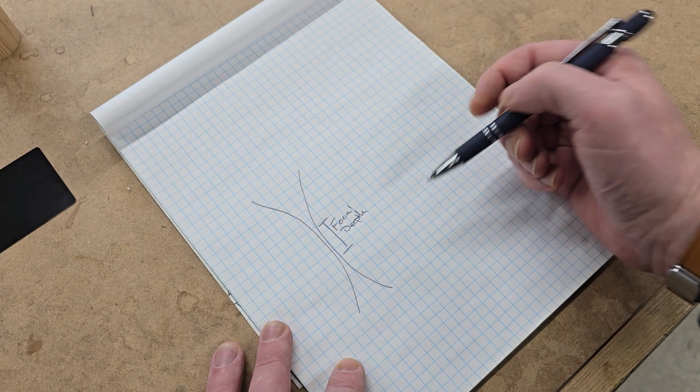On a CO2 or fiber laser, a non-3D laser, depending on your lens, this focal depth can be quite large. One thing to take into account is that with a UV laser, we have a very, very small focal depth. With that small focal depth we get an incredibly great level of detail, but we need to remember it's very easy to get out of focus with a UV laser.

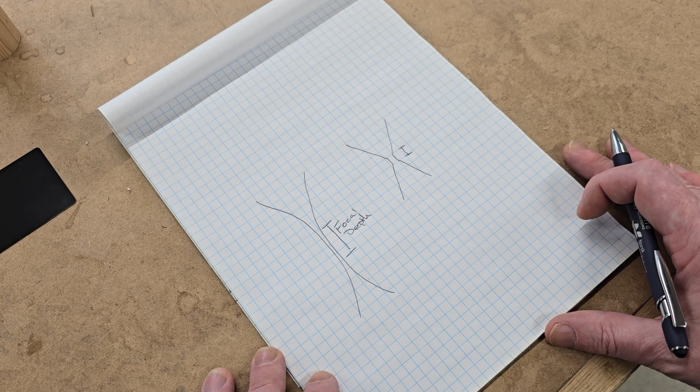On some materials it doesn't make much difference, but on glass this is critical - we have a very small focal depth, and we need to do everything we can to ensure we're marking in the correct location. That's just something I wanted to quickly explain. I think most people understand this, but you never know - some people might be buying a UV as their first laser, so this is important to remember. We'll talk about it more as we get to the laser, but just remember, when I say focal depth, this is the distance we're talking about.

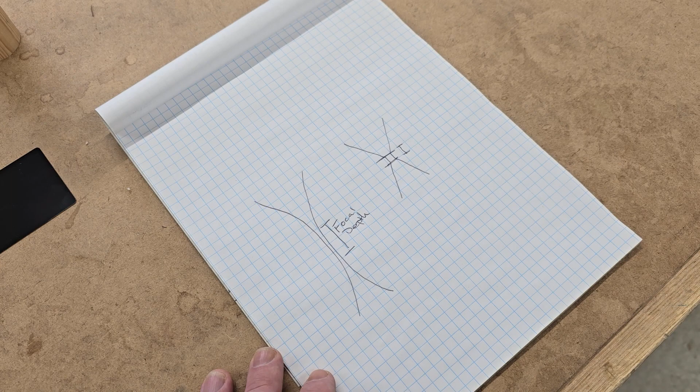Okay guys, welcome back to the video. Let's get started. We're going to start with something very simple - the aluminum painted card that you may have received with your laser. If not, they're all over Amazon and very easy to find. It's a great way to dive in and get your feet wet.

First, you'll notice we're working in our 200 by 200 millimeter workspace. We'll do that for all three of these objects, so this entire video is going to be run on our 200 by 200. That gives us a 120 millimeter working depth, so that's how much Z height we have to work with. We'll be doing everything at 0.

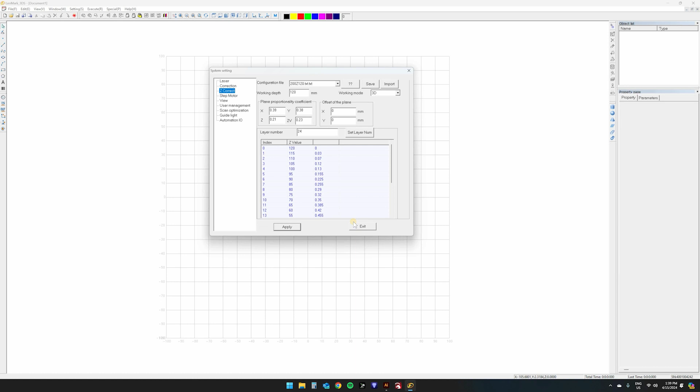We don't really need to worry about working depth at the moment - we'll get into that. So let's get started. First thing we're going to do is import a graphic. We've got a nice Hao Tian logo right here ready to go. We're going to resize it first - let's do 50 millimeters by 57. That ought to work just fine.

Anytime you're working in this software and you see an apply button, always hit that to double check. Next we need to set our hatch parameters. I don't want an outline - I'm going to use the optimized hatch with all the optimization features. I'll leave the angle at 0 and set a distance of 0.01 millimeters, then hit apply.

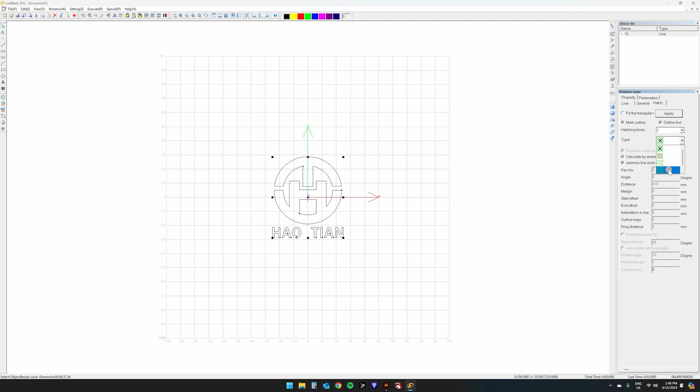Now I'm going to quickly set my parameters here, and then we'll talk a little about how to set it up properly. With this I'm going to do 2000 millimeters per second at a frequency of 60 and a pulse width of 95. I run my laser with an inverted pulse width, so that 100 is full power and 0 is no power. I think a lot of people don't use the inverted, so your numbers will likely be different. I just prefer it this way, it's easier for my smooth brain to figure out.

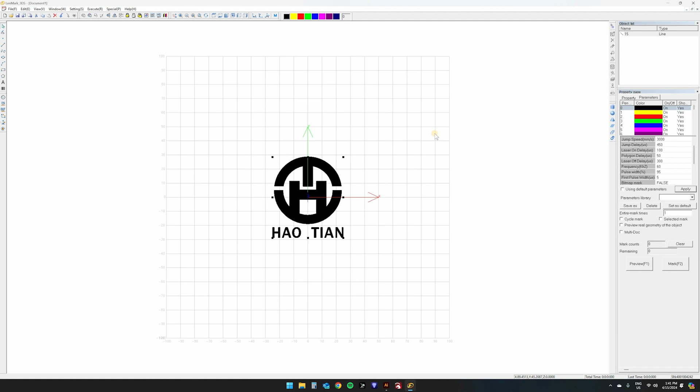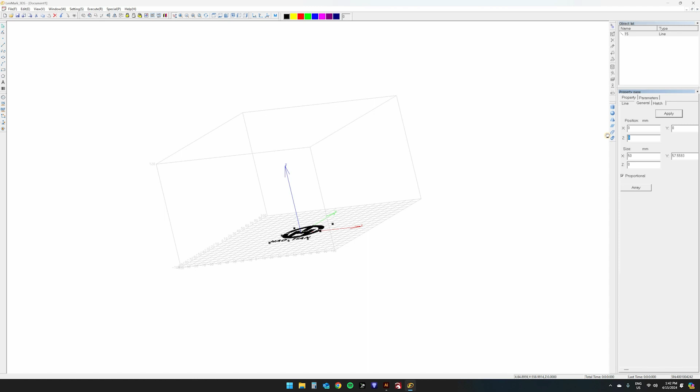Okay, now on almost any other software not using a 3D laser, you'd think you're essentially ready to go. We are not. Because we're using a 3D laser, if we rotate around we can actually see that 120 millimeter working depth I was talking about before. Now, the way these lasers work is we always want to start at the top and work down. Technically you can do it from the bottom up, but I find it can get a little confusing, and focusing, in my opinion, is a lot easier doing it this way. So what we need to do is move our graphic all the way up to the top of our box, which we know is 120 millimeters. So let's go to our properties, into general, and set our Z height at 120 and hit apply.

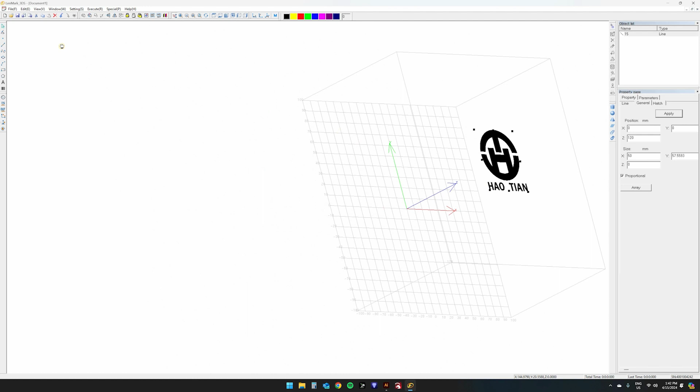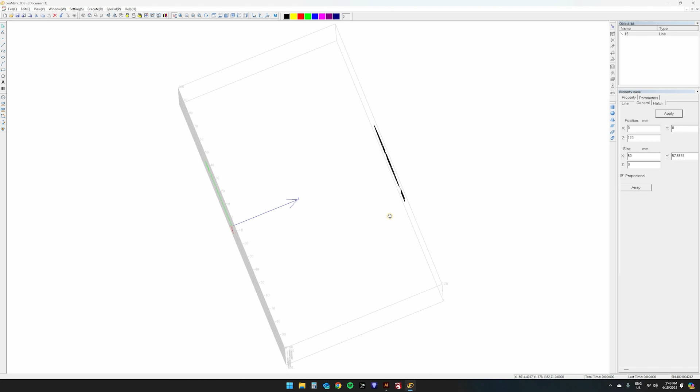And now you can see we are right at the top there. So now when we go to focus, using the focus distance written on the side of the laser head, we can focus directly down to that highest point, which on a card, the highest point and lowest point are the same, but this is something you need to remember when we get into the 3D stuff, which we'll do right after this. So we're good to go. We've got our parameters set, we've got our hatch set, we've moved the graphic in its Z height all the way up to 120 millimeters. So let's head over to the laser, focus it, and run this engraving.

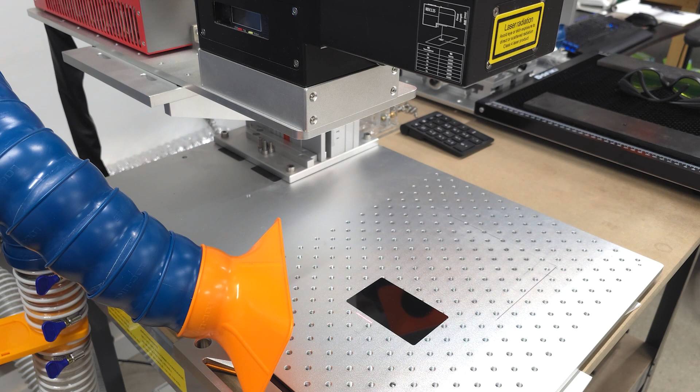Okay, we're at the laser. We have our card ready to go. First thing we need to do is focus our lens to the card. I use these focus sticks that I've made, I've got a few different styles. With this card you can measure. Why don't we show that? You'll want to make yourself some focal sticks, because here we can move the card off to the side and measure up to our mark on the bottom of the head. When you're using a 3D object or glass that's directly under the lens, it gets really difficult to use a measuring stick, so you'll want to make a focal stick for that. We can reference our chart here for measurement height, and our 200 by 200 workspace requires a 234 millimeter distance. I'm just going to move it to the front so I can see it better. 234, there we go.

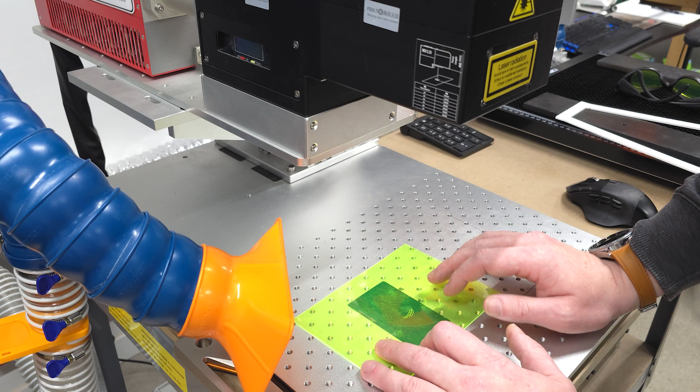Now you can see we have our outline. It's a little difficult to see on this black card. These gels can help quite a bit. I'll have to give Dean a big thank you for sending me this. I believe it's a photography flash gel, but they work great. We're ready to go. I use a wireless mouse here with shortcuts set on these buttons. I believe it's F1 and F2 to preview and fire. So here we go, let's fire it.

Here we go. Pretty simple, not hard to do, like I said. Things do get a little trickier when we start moving into 3D objects, so why don't we do that? Congratulations, you've done your first engraving. Let's move on to the real fun stuff.

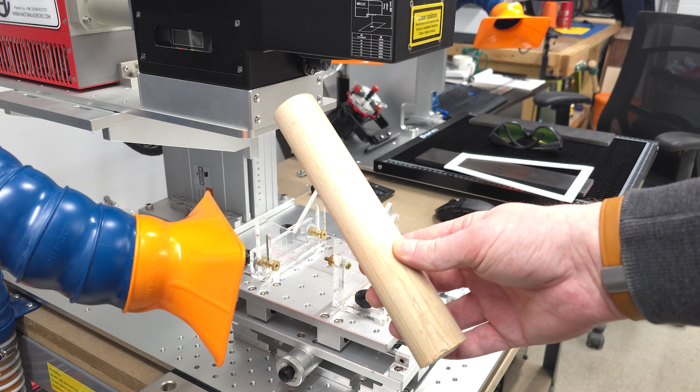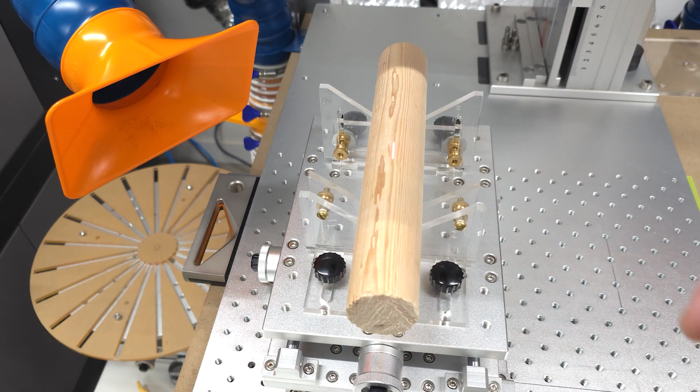Okay, moving on. Next thing we're going to do is a mark on this 1.5 inch diameter piece of hemlock dowel. Again, wood isn't quite as focal dependent as glass, so we've got a little bit of leeway. But what I'd like to show you here is that I'm going to be using this same jig setup for glass. So you'll see that I've got an XY table here, I've run a center line down it as well. You probably can't see them, but I do have center marks on the acrylic line here, and I simply projected a straight line and line mark to line everything up with that.

We'll talk a little bit more about why that is so important with glass. Wood, it's not quite as detrimental, but it's good practice to always make sure everything is as centered as possible when you're working with a 3D laser. And in particular glass, like I said, we talked about that focal depth a little bit earlier.

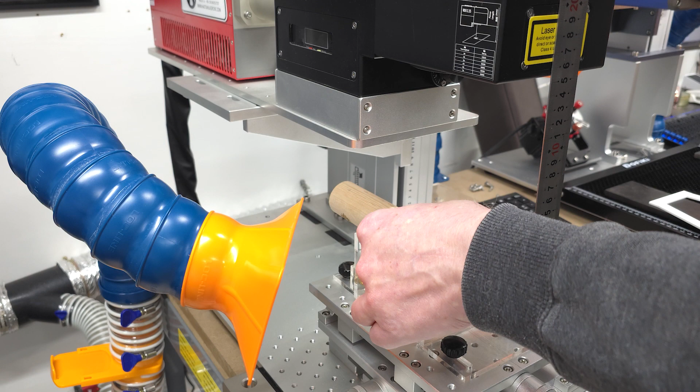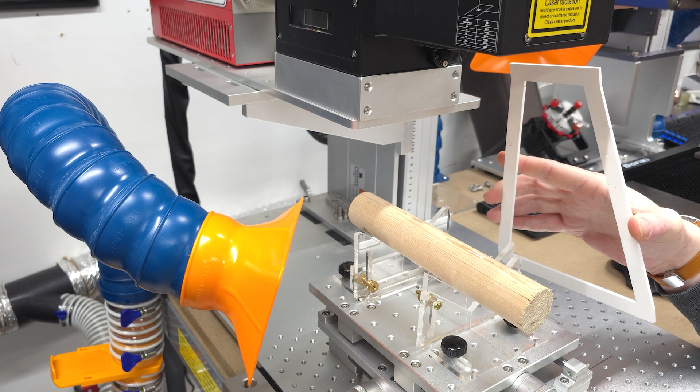And with glass, that focal depth is extremely important. So again, same thing we did before. We're going to focus the very top edge of our object to the lens, and this is where I say to use some kind of a focal stick. With this object, we can really pull it down a little bit and measure from there. Now, if this was not nearly this long and we needed it there, we can't really measure from there. So let's upgrade to our focal stick. Let's use that for the rest of this video. Move the head up and focus to that top edge. There we go.

Now, I typically like to set my object in its place and get it ready to go before I move into the software. And the reason for that is that you get a little bit better of an idea of your framing and everything. You want to make sure everything's in focus. It's very easy to hop over into the software, get everything set, start framing, and then things don't look right. And the reason for that is that you're not focused yet, and sizes will change when they're out of focus. So getting your object down, aligned, and focused first is just a good way to make sure that you don't skip a step later on.

So that's ready to go. Let's move back to the laser. Sorry, back to the computer.

Okay, here we are back in LenMark. I've just started a new document and just imported that same graphic. So let's get started again.

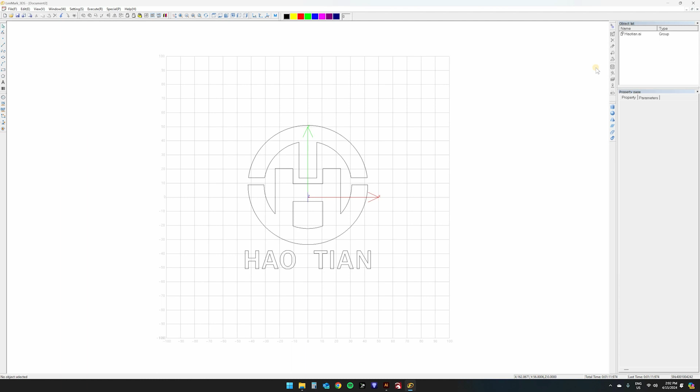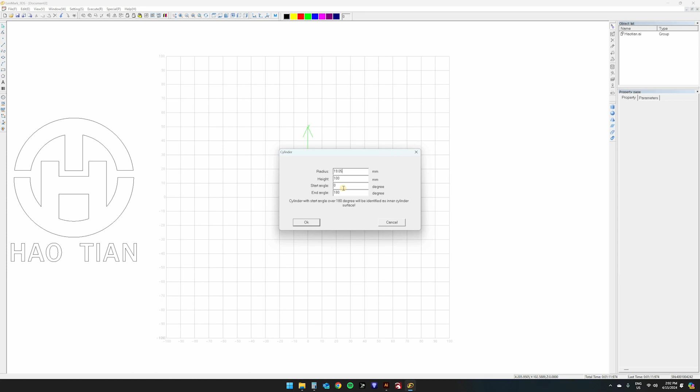First thing we need to do now is create a model to engrave on. We're using a cylinder, so we'll start with that. We're going to need a calculator because we're working in millimeters. So a simple cylinder. Now, I said before that this was 1.5 inches, so let's get that into millimeters. That's 38.1. We'll divide that by 2 to get our radius, 19.05. For this particular object, our height doesn't really matter much. And I'll do a start at 0 and end at 180, so we only have half of a cylinder. There we are. That is our model that we will be projecting this graphic onto.

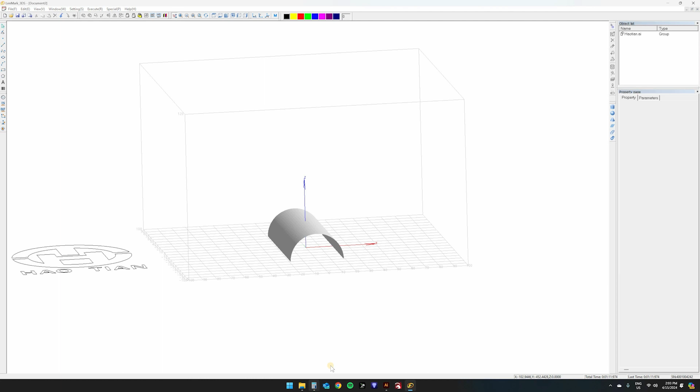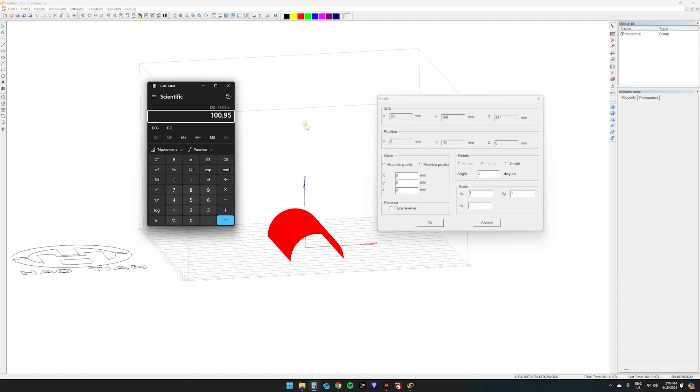Now, same thing, we need to move this up to the top of our working height, and we're going to have to put a little math into this one. Let's select it first. We can bring up our move window. So we know our radius is 19.05. Let's just take 120, subtract 19.05. That gives us 100.95. That is the height we need to move this up to get it to the top. So we'll add that into our Z column. We'll click the relative position and hit OK. Now we can choose a side view just to quickly verify that we did our math correct. The top of our cylinder is at the top of our working field.

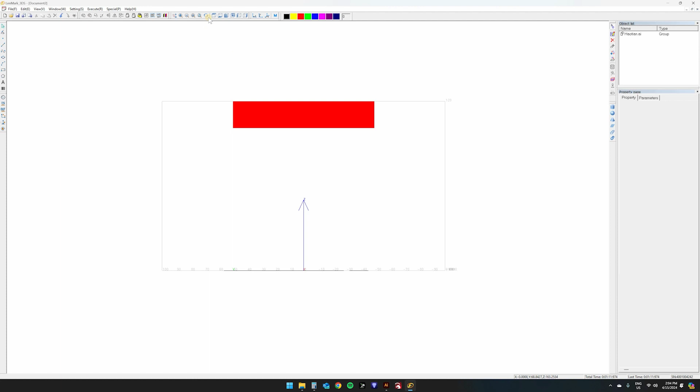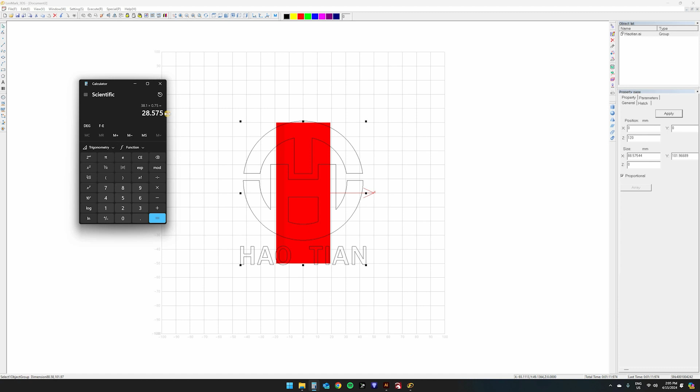So we know that's good. Let's go back to our top view. We're going to select our graphic and bring it back down to the origin, which is 0x, 0y. Now for placement, I usually like to bring it up to 120 so we can see it on top of our object. Obviously this is a little bit big, so why don't we move that down? Let's do, say, 75% of diameter. So we have a 1.5 inch cylinder. We'll turn that into millimeters by multiplying by 25.4, so that gives us 38.1 as a diameter. And let's multiply that by 0.75, so that's 75% of diameter, which is a pretty common target for most cylinder engravings. 28.575. So we'll resize this proportionally by that 28.575 and hit apply. That's looking pretty good.

Next thing we need to do is we need to hatch this. Again, I don't want an outline. I'm going to do a bidirectional hatch on this one. I find it works much better for wood. Again, all of the options selected, but this time we're going to do a 0.07 millimeter line distance.

And there's a few schools of thought on this when doing 3D engraving. Some people like to do a 90-degree hatch, which would be this direction, so that the focusing lens, when you'll essentially be engraving the entire thing left to right, the focus lens doesn't have to do as much work. It only really has to move in, then out, then back in. If you're doing a 0 degree where you're moving, say, from bottom to top, your focusing lens on the head is going to be focusing in, out, in on every single path.

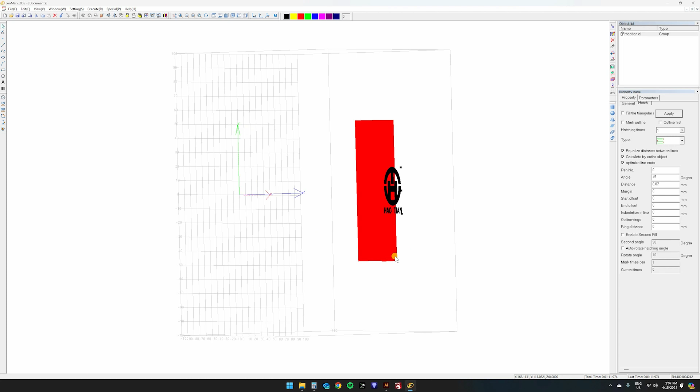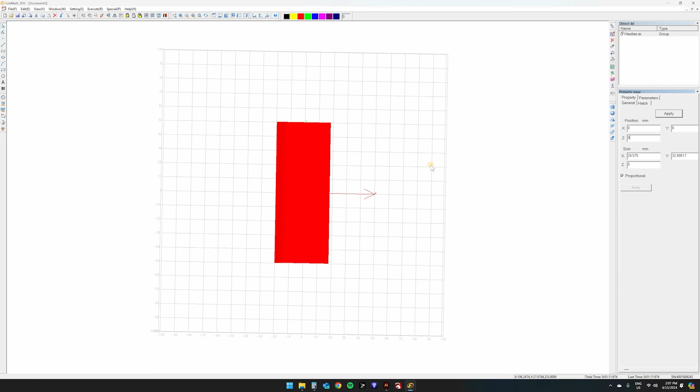Now, this is one of the common problems Mark has been seeing when we're projecting a graphic onto a cylinder. It's a little different when using these tools. You can actually project from that 120 height. When using imported models, you always have to have the graphic down at 0. Honestly, whenever I'm doing a projection onto a 3D object, I always just start at 0 anyway. You can still use the wrap feature, or you can also use the straight projection.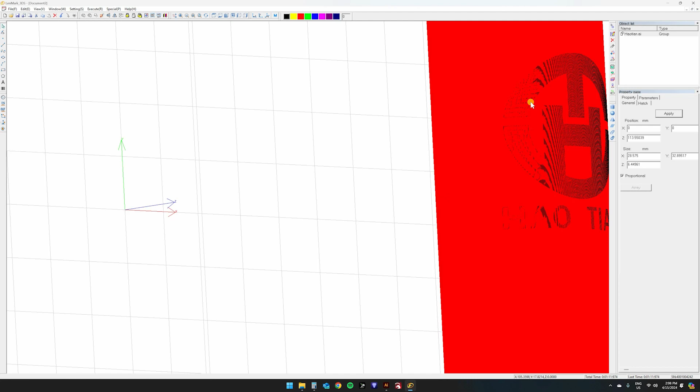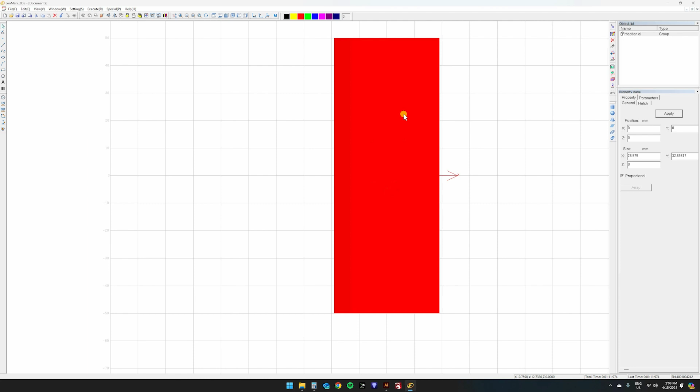Again, it's kind of hard to see. The difference is that this projection mode essentially projects it straight down. You'll see that it's starting to stretch out from our original width up here, whereas if we do the actual wrap, it's the same size. So essentially what it's doing is taking the graphic and shooting it straight down. If you're looking at this object with your eye from this space, you will see that exact shape.

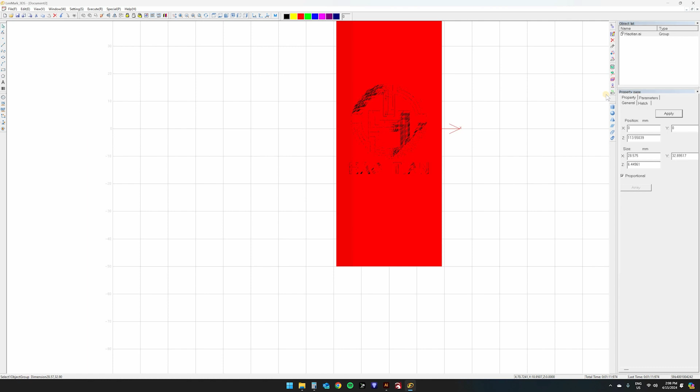I'm sure a lot of you know that when we're doing circular objects on a wrap on a cylinder, we start to get that egg shape. So we correct that by stretching our circle out into an oval, so that when we engrave it, we actually have a circle when you're looking at it. This straight projection mode is essentially just doing that for us, and if you're using an imported model, you'll have to use that mode anyway. So I use it most of the time. Sometimes I don't. It really depends on what I'm doing.

So again, let's take a quick inventory. We've set our burn parameters of the Haotian logo here. We've projected it onto our cylinder. You can see it wrapping around, and we're also at the very top of our 120 mil working depth. So we are ready to go. Let's go back to the laser.

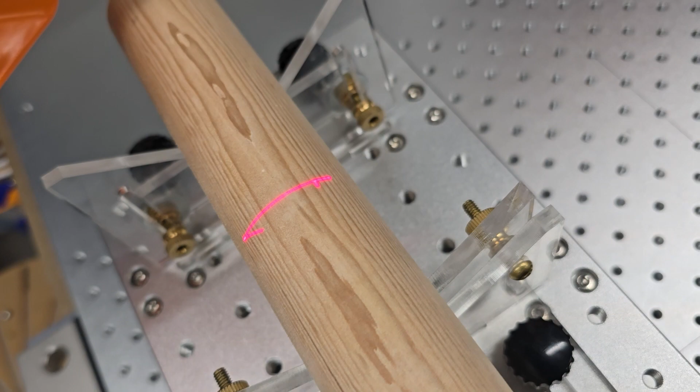Okay, here we are. So again, we've already focused, we've already placed our object, we've got everything on the software set the way we want it. We can do a quick preview. Looks pretty good. Now I'm going to take this off of the tripod so we can get a better look at the actual engraving. There we go. Let's fire away.

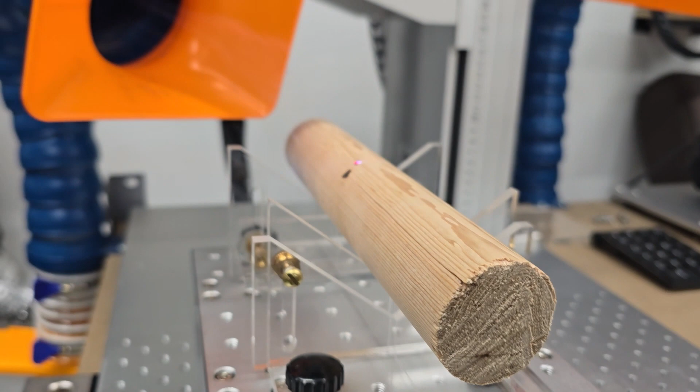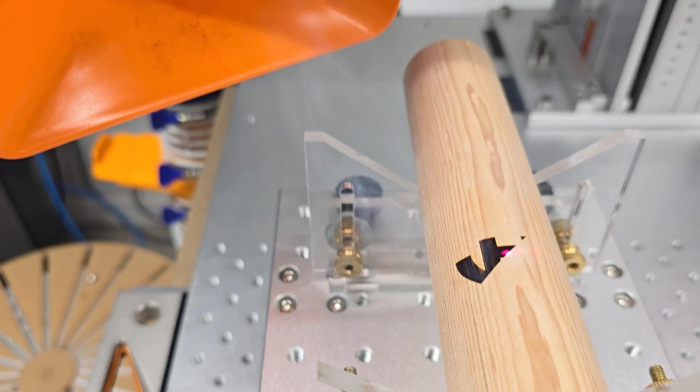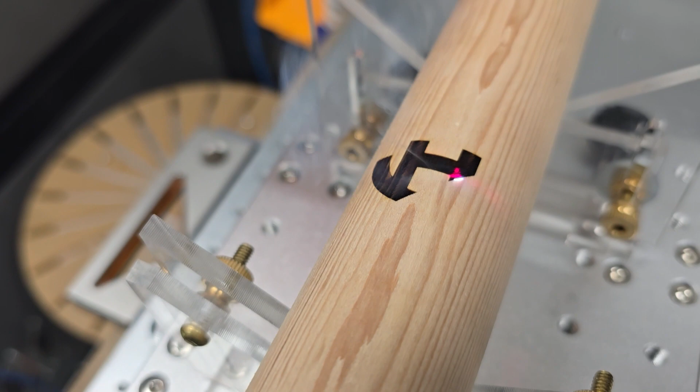Now again, I told you I like to go pretty slow with wood, but that beautiful black engraving is exactly why - that could be tough to get with the CO2. I'm just starting to wrap around the other side now. Get a proper focus. With wood, you really can go a lot further on the diameter, which is very easy to engrave with the UV laser.

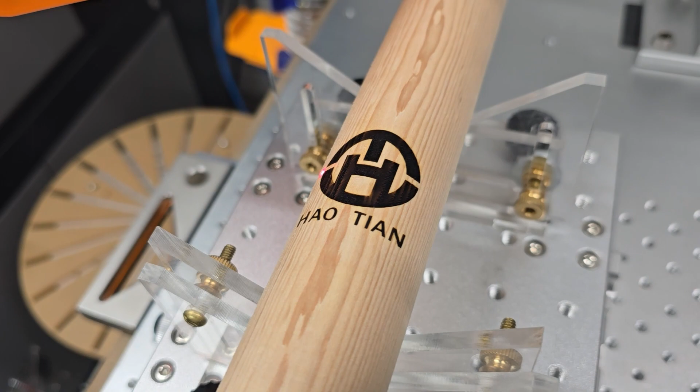Just a little bit of text left, and we're done. There we go, that's it. You can see we got that wrapped down. A little tough to focus, which is going to be a lot more fun to deal with when we do glass. You'll find out glass can be really tricky to try and video and engrave at the same time.

Now here's what I'm talking about with those projection modes. You can see that the circle is actually quite a bit distorted when you're looking at it from the side, but if we look at it directly straight on, we have a perfect circle. So that's really just what that projection mode is doing. Again, play around with it.

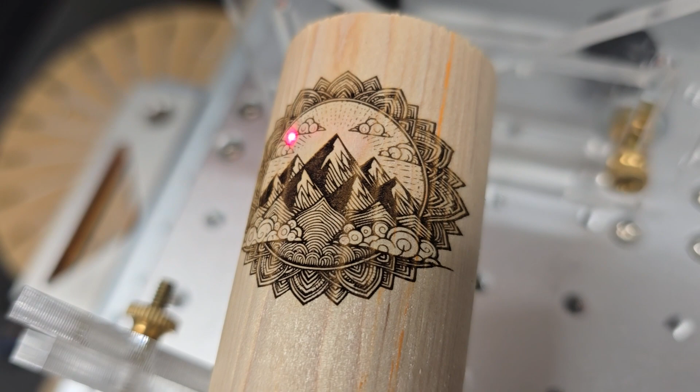So there we go. This dowel I just bought from Home Depot - actually, it was in the trim section, so I was able to just cut off a couple of feet. It only cost me a couple of bucks. And I'm not going to lie, engraving these dowels is a whole lot of fun. Here's another engraving that I've done on it, and you can really show off the detail that UV laser can get. It's the exact same process, same settings, same everything, just a different graphic.

So there we are, congratulations. That may or may not be your first 3D engraving. If it is, good job, you're probably having a ton of fun right now. So let's move on to the real challenge. Glass can be tricky, it can be very tricky, and all of the things we've learned so far, we really need to take into account. Now, like I said, I'm going to be using this exact same jig for this glass.

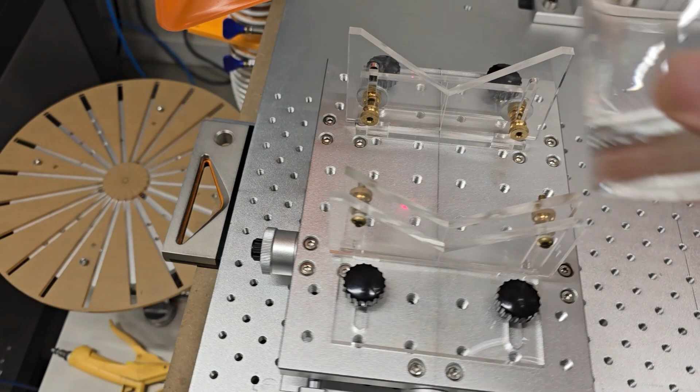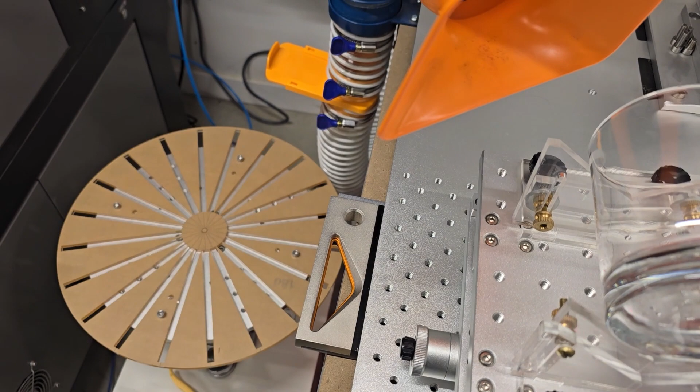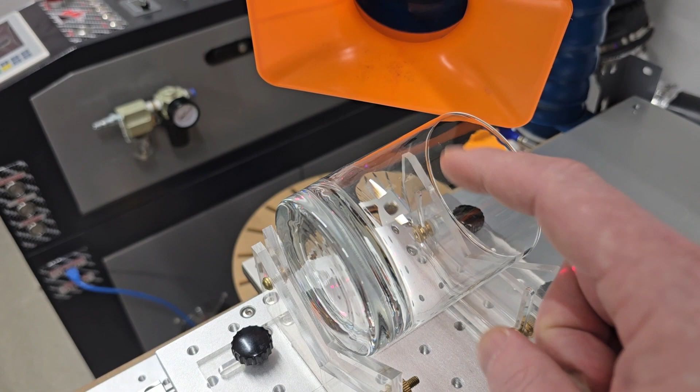We're going to be doing a little bit different setup in the software, just a few extra steps, but we're still going to use cylinder. Again, having your jig centered is critical. If you're using a proper cylinder, ensuring that this top is level is also critical. Now, I know that this is a cylindrical cup, and I know the height of these two standoffs are equal, so I know that this is level.

Now, being level is only pertinent if this is a cylinder. If you have a tapered cup that has a smaller diameter at the bottom, we don't want that top level. We want to make sure the cup is straight. And there are many different ways to do that. You're going to have to find your own way. I find using my grip rotary is a great way to keep things straight for tapered cups when doing glass. I don't actually use the rotary, I just use it to hold the glass. But for cylinders, this works great.

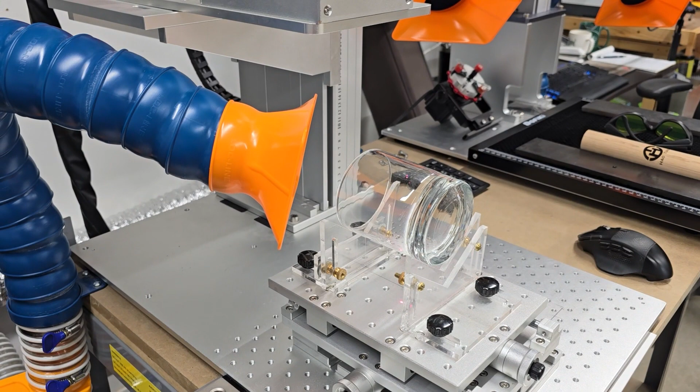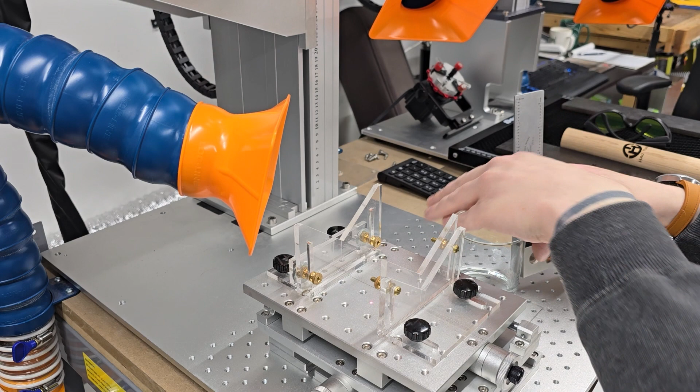Now I'll quickly pop this back into the tripod here. Sorry for my fat fingers. We're going to do the exact same thing. We're going to set our focus height, again with our focal stick. Now, actually, I'm going to double check this because this is not looking like a true cylinder. It is not. There is quite a taper to that. So I'm going to reset. I'm going to set up with the grip rotary there. And we'll come right back.

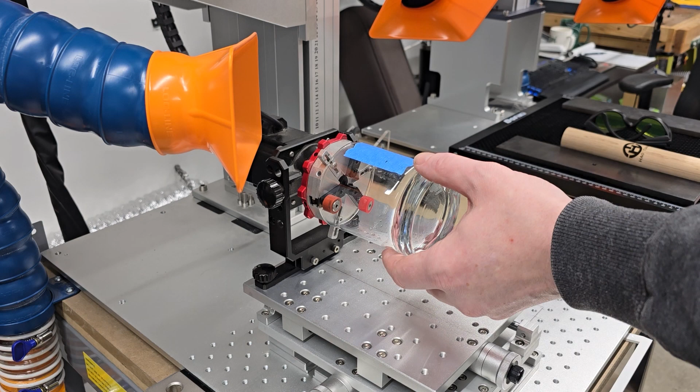Okay, we're back. So we've reset using our grip rotary. One thing I'd like to mention is that I have the head of my laser squared to this table. So what that means is that I can use my engineer square to ensure that the XY table is square to the table itself. And then I can also make sure that the rotary is square to the XY table. That's going to keep everything straight in both our X and Y directions.

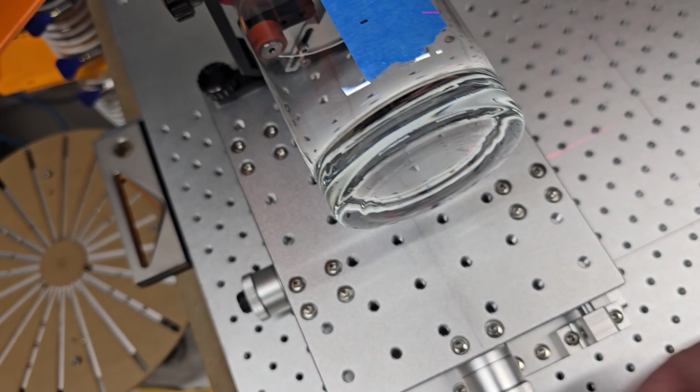Now, I know that this rotary is already centered in our X axis, but we do need to center the glass in our Y axis yet. So I just put a quick piece of tape onto the cup and mark its center line, and we're just going to move the XY table until our alignment cross lines up with that mark. So there we go. Our glass is centered in our X direction, it's centered in the Y direction, and let's remove this from the tripod again.

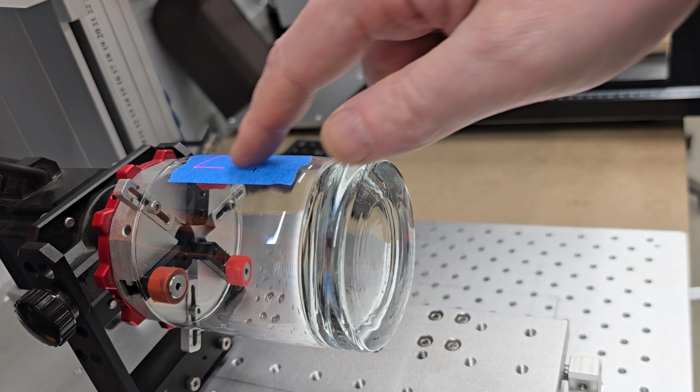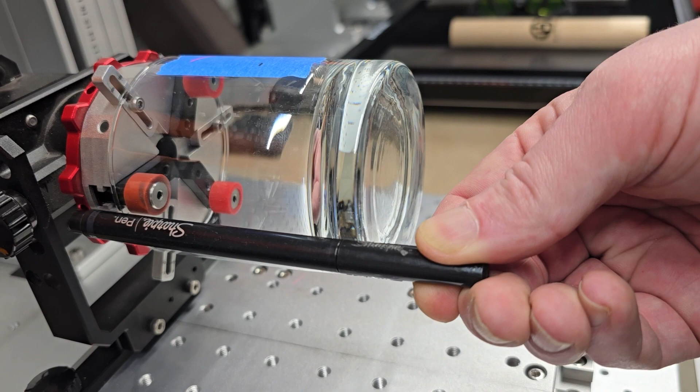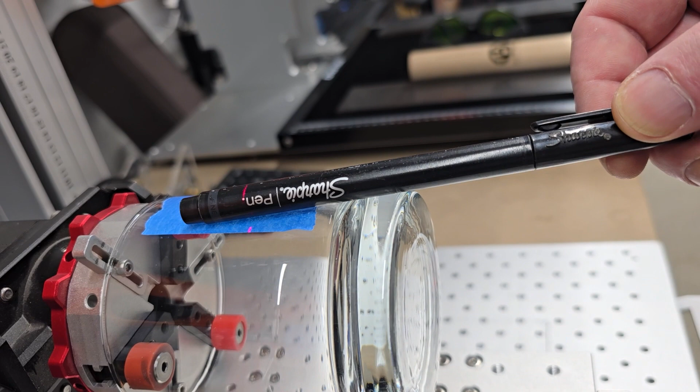This top edge surface is not level. The central axis of this glass, you can imagine going through the very bottom all the way through. This central axis is parallel to the table. That is the important thing with the UV laser. That's how our model is going to be set up. If this top surface was level, we also have to figure out how to rotate the model in our software to reflect that. That's a tricky process.

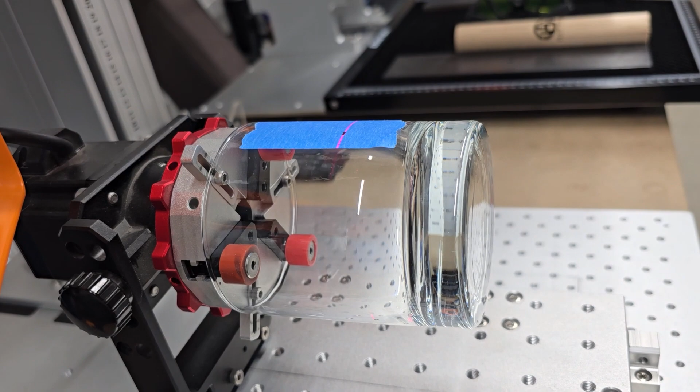I know this rotary is set up with a face square, which means that I know this central axis is also parallel to the table and will match our model in the software. And again, we'll double check our focus to the highest edge, which will be at the top. There we go. Remove this piece of tape. All right, let's head back to the software and get this set up.

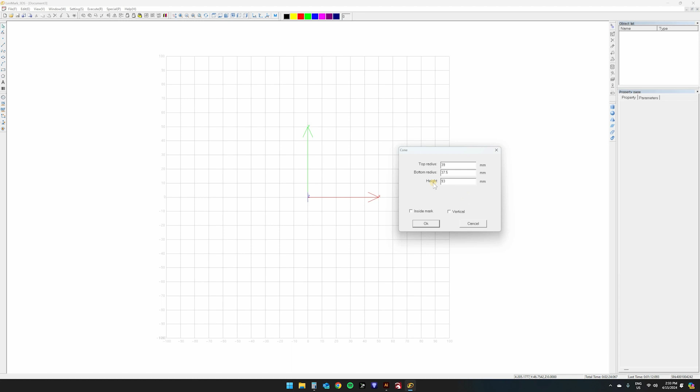Like I said, we're starting a cone here. Now I have my diameters, but we need radiuses, and as you know, your radius is half of your diameter. So we have a top diameter of 78. Divided by 2 is a 39 millimeter radius for the top. The bottom we have a 75 millimeter diameter. Divided by 2 is 37.5. And we have a height of 93. We'll hit OK. There we go. We have our cone.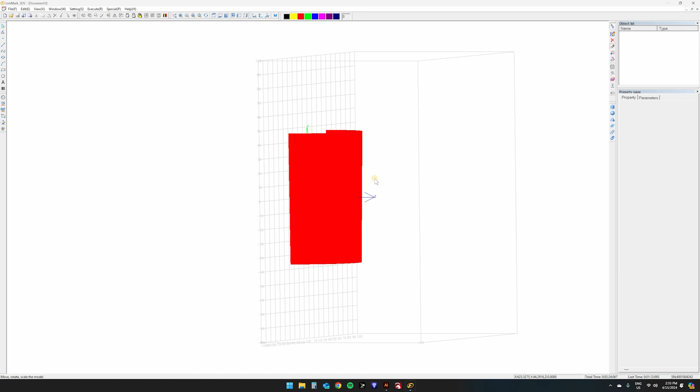Now again, same as before, we need to move this top edge right up here, which will be our highest point, up to our 120 millimeter working space. So we will move it again. And you can go back to your cone here just to reference your heights and radiuses. So we have a top radius of 39. So again, onto our calculator, we'll do 120 minus 39. That means we need to move this object up by 81 millimeters in the Z height. So again, into the Z.

I've already forgot what that was because I have the memory of a goldfish.

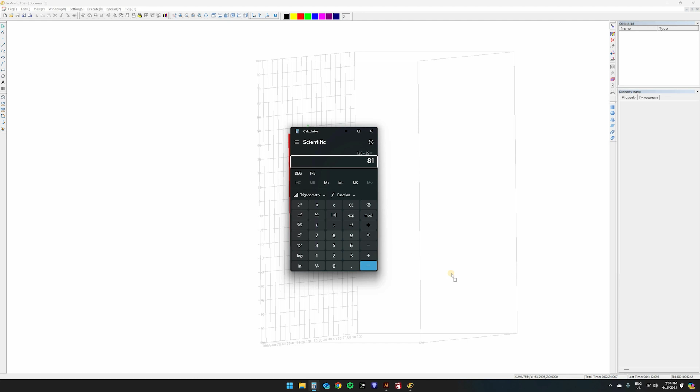Sorry about that. Top radius of 39. 81, let's remember that this time. We're going to move that up by 81 millimeters relative. Okay. Again, you can do a side or back view to double check that the very top edge of your model is going to be at 120. So we're good to go. Our model is set.

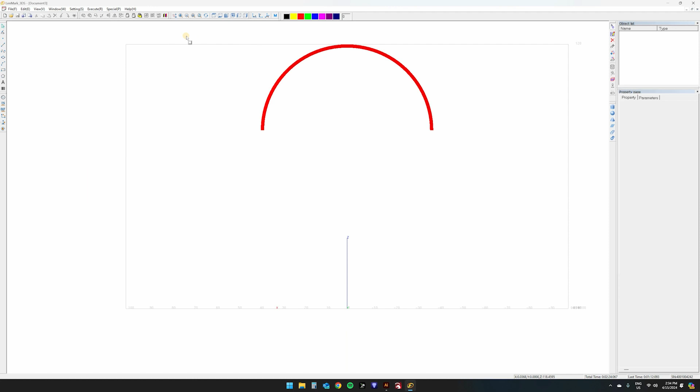So again, we'll import our Hao Tian logo. And again, I like to always move it up to 120 so I can see what I'm doing. Now for this, we said we had a top diameter of 78. Let's target 70% for our width. So we'll multiply that by 0.7. That gives us a 54.6 millimeter width of the graphic that I'd like to do. So we'll just call that 54. We'll resize that in the X direction proportionally.

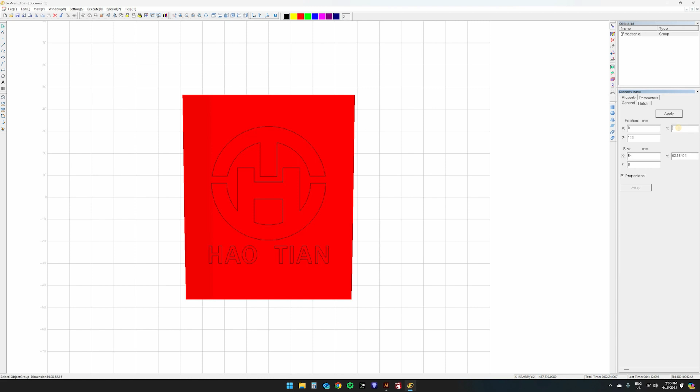We'll hit apply. Now this rocks glass has a very thick glass bottom, which is somewhere around here. We could actually measure it, but I'm not going to. What I'm saying is that it looks a little funny if you engrave over that thick glass bottom. So let's just move it up a little bit. I think that'll look quite nice there. Apply, and we'll move on to our hatch settings.

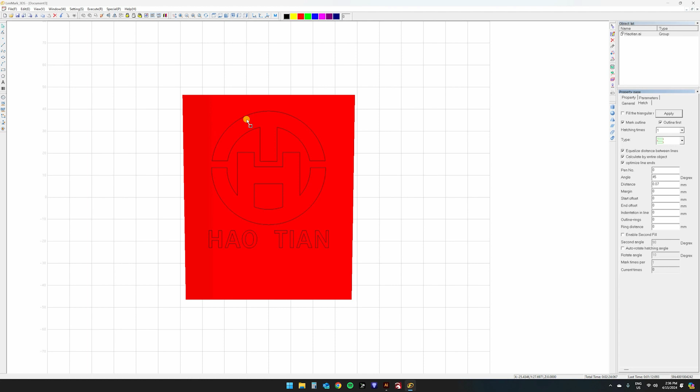Glass, I like to use a bidirectional. And this I actually do like to do an outline, and I like to outline it first. Sometimes I find it just gets the laser firing a little quicker, and sometimes you'll get a bit of a lighter engraving on your first passes, so an outline seems to help with that. Again, all the optimization settings on. I also like to use a 45-degree angle for glass because we're still going to be moving quite slow. Use a 0.025 millimeter line distance and a single pass. So we'll hit apply on that.

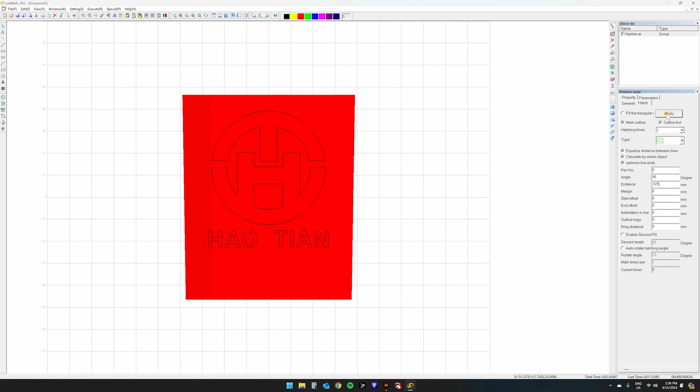Let's quickly move into our parameters again. For glass on a single pass, I like to run a 350 millimeters per second speed with a 45 frequency and pretty close to full power, 95. Again, I am using inverted power pulse width modulation, so 95 is almost full power for me. We'll hit apply on that. Now again, we want to move this graphic back down to 0.

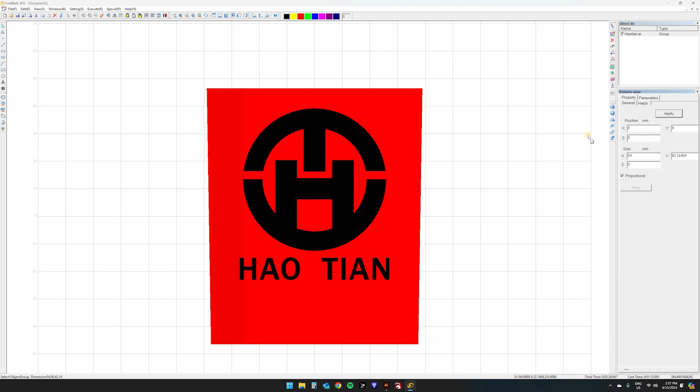And then because it is a circular logo, I like to use the straight projection. And those lines always look a little funny. This is just one of those oddities of LenMark. It kind of just is what it is. Sometimes things can look a little funny, but once you get to the engraving, it looks just fine.

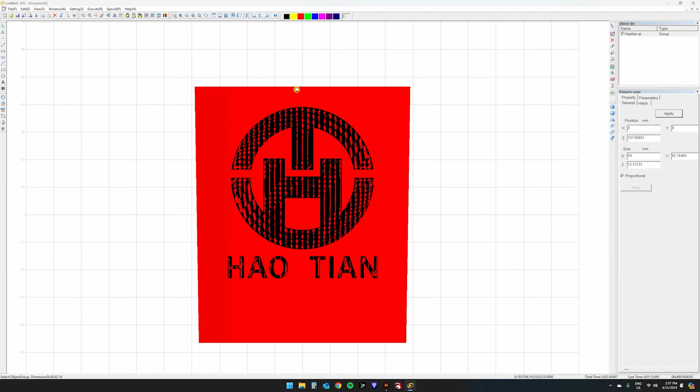So again, a quick little inventory. We've created our cone, our tapered glass. We've moved that up in the Z height. We've set our hatch and our engraving parameters the way we would like, and we've projected that graphic onto the model, which again has some strange lines, but we don't need to worry about that. Okay, back over to the laser. Let's fire this one.

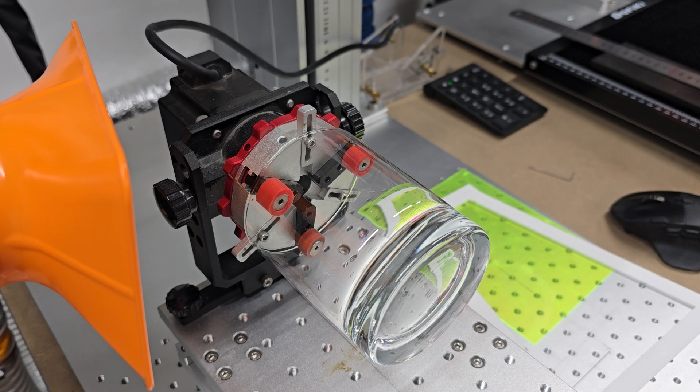Okay, so we're back at the laser. We had a little bit of problems on the last engrave, I'm not gonna lie. I was playing around with the 64 and 32-bit software and some of my calibration got thrown out, so I have to make a few adjustments here. I did slow it down a little bit. And I do see there's some inconsistencies in the glass in this area, so I just decided that I'm going to run a crosshatch just on the test. Other than that, everything else is the same. Setup is the same. The alignment is the same. The projection on the software is the same. So we'll run this. Here we go.

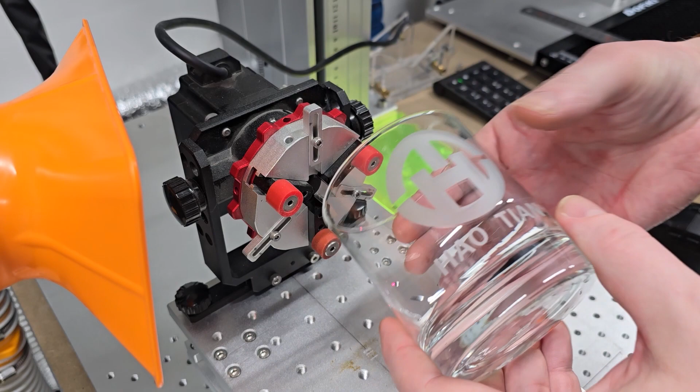Okay, there we have it. Nice little Haotian rocks glass with a nice frosty engraving there. So again, on glass, things can be tricky. Take your time, make sure everything is square, straight, aligned, focused, level, that your model is correct and accurate in the software. And don't get frustrated, because it does take some time to get the knack of it.